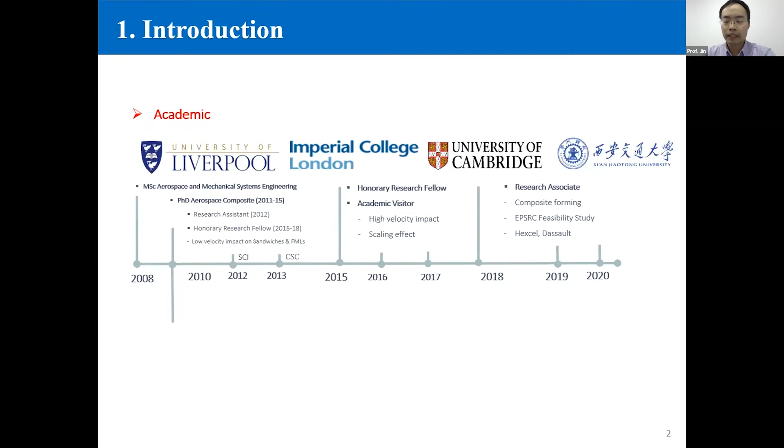Professor Wesley Cantwell already introduced my experience. I got my PhD from Liverpool University, and after that a short academic visit at Imperial College and a 1-year postdoc research at Cambridge University. I joined Xi'an Jiaotong University from 2019, and before that I also worked in industry for 8 years in Liverpool.

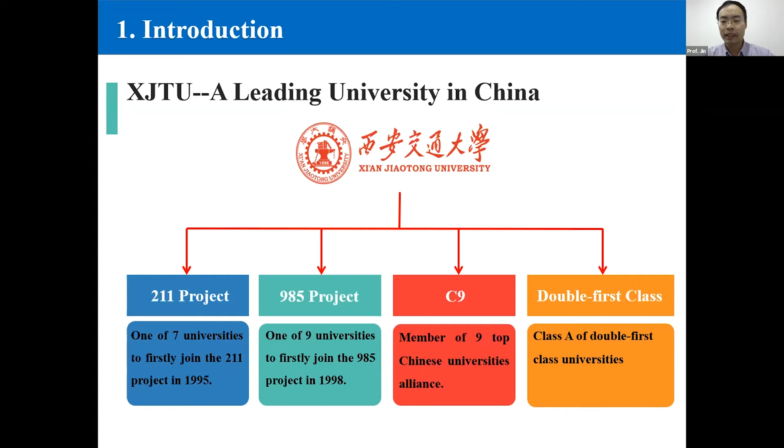Now I would like to introduce my university. It's a leading university in China, so I'll quickly introduce it. I think it's a top 10 university in China in engineering and research. We have 5 key laboratories in engineering, and now we have 4 campuses. The biggest campus is our research hub, and all postgraduate students are in the new campus, which opened in 2019. We also have very good research facilities to support our research.

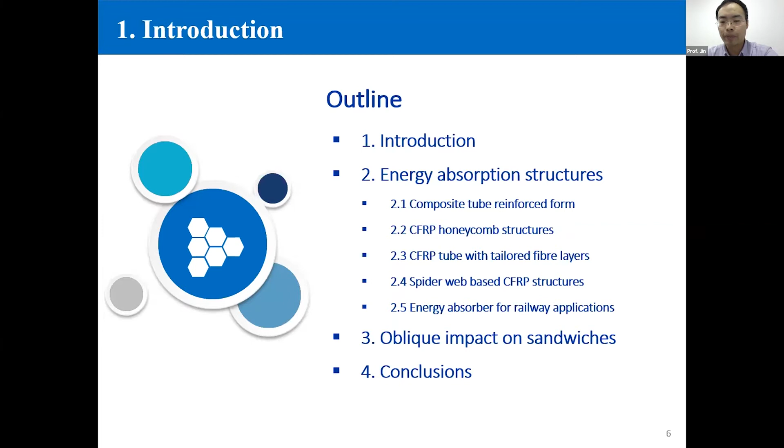So this is the outline of my presentation. Today I will focus on energy absorption structures for aerospace and railway train applications. I would like to introduce 4 structures, including composite tube and rod reinforced foam, composite honeycomb structures, composite tubes with tailored fiber layers, and spider web based carbon fiber reinforced plastic structures - that's our latest work. Finally, I would like to introduce our project for railway applications. The third part is to introduce the latest experimental work on oblique impact on sandwich structures. Yeah, this is the outline.

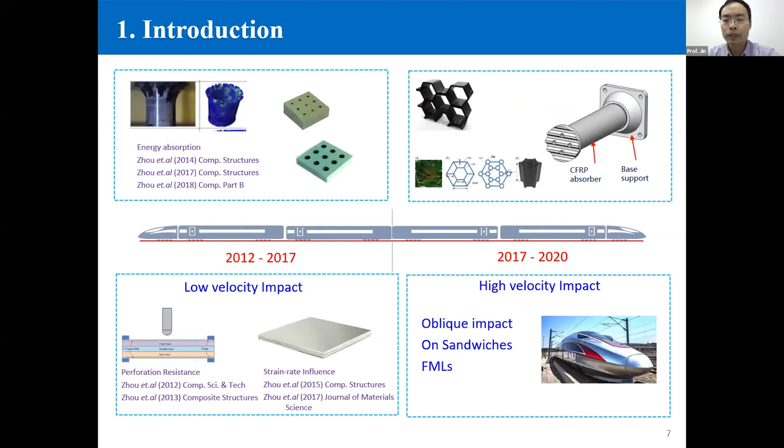So firstly, I would like to focus on energy absorption and dynamic loading rate on those structures. Those structures include honeycomb structures and composite reinforced foam. For the energy absorption structures, I would like to introduce my early research work with my supervisors Professor Wesley Cantwell and Professor Zhongwei Guan. That's composite reinforced foam and carbon fiber reinforced plastic honeycomb structures.

We did both experimental work and modeling work, focusing on dynamic loading rate on those structures. Later we continued working on composite tubes for energy absorption applications. The carbon fiber reinforced plastic tubes with tailored fiber layers increase the energy absorption capacity, and also show higher energy absorption capacity at dynamic loading compared to the quasi-static loading rate. The latest structure is the spider web based carbon fiber reinforced plastic structure - it's very interesting, with a new manufacturing process.

Later I will introduce the latest work, including oblique impact on both sandwich structures and fiber metal laminates. That's the outline of my research work.

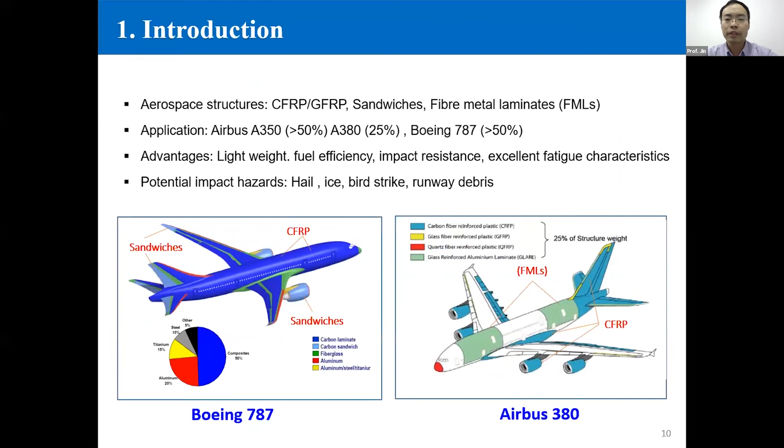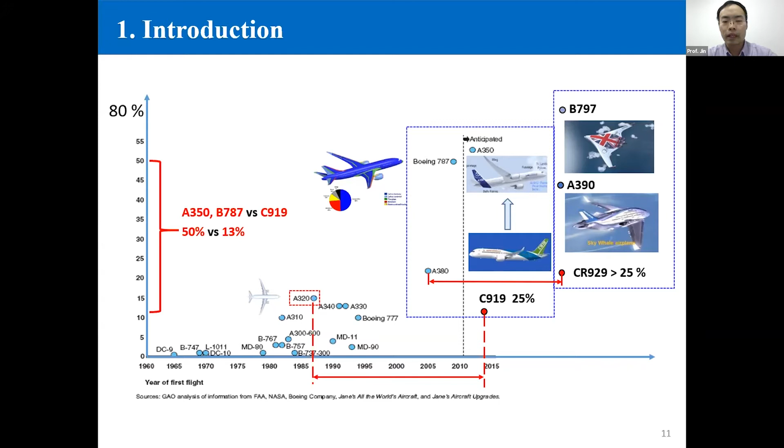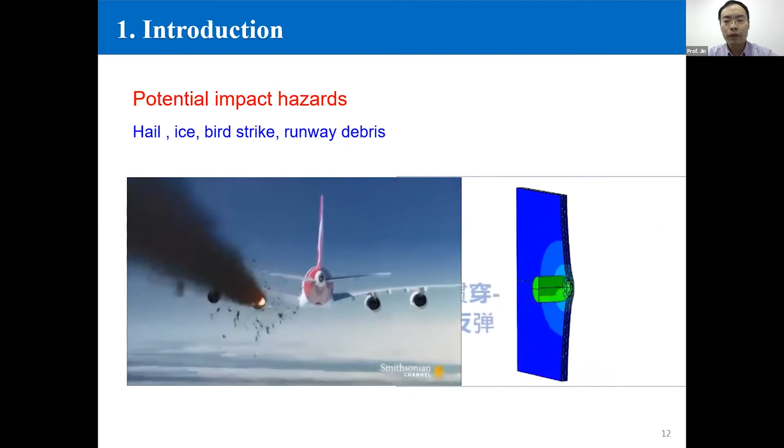So I will quickly go through the introduction. We focus on lightweight structures because lightweight design is important in the aerospace industry, and the potential hazards include bird strikes, runway debris, and engine failure. So we focus on impact on composite structures.

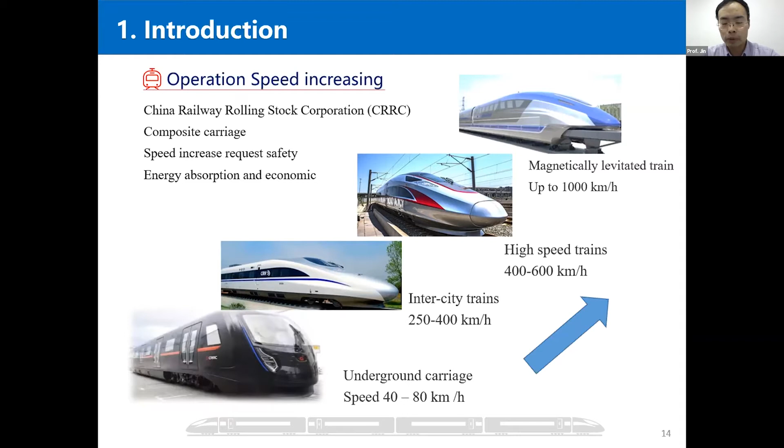Composite applications are increasing, not only in aerospace but also in railway high-speed train applications. For example, in China, the application of composites is increasing. The picture on the left is the all-composite cargo carriage for underground trains, which reach speeds up to 80 kilometers per hour. But the latest trains, including high-speed trains, reach speeds up to 600 kilometers per hour. So our latest research focused on impact loading on those composite structures, and also energy absorbers for high-speed trains.

That's application in the industry. The background first focuses on bird strikes. So we did quite a lot of impact tests on sandwich structures for high-speed train applications, and also composite tubes used for energy absorbers have been used in high-speed trains in China.

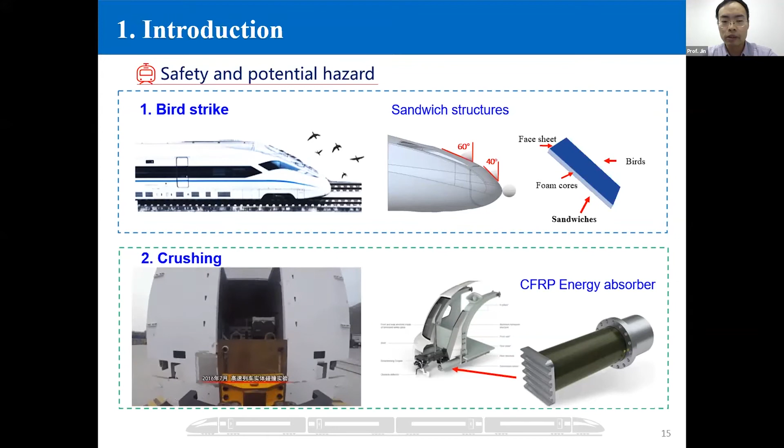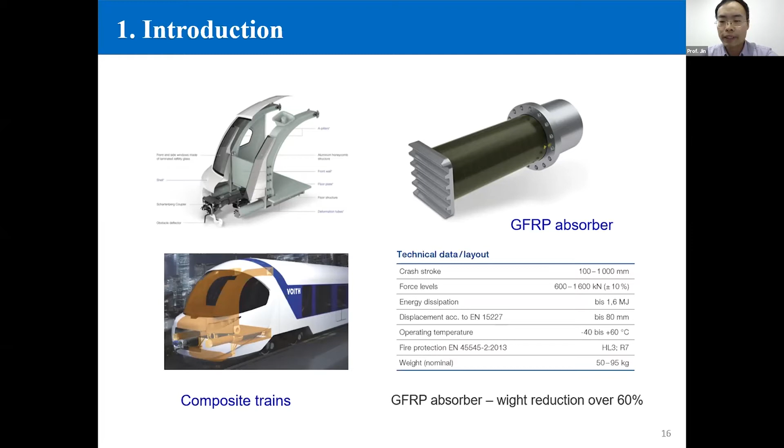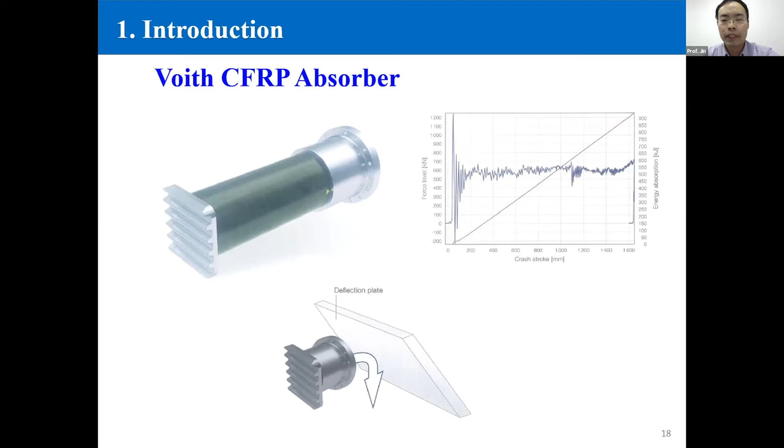So we got a project focused on developing a new energy absorber for energy application, and the maximal force required is 600 kilonewton, and the energy over 240 kilojoule. This is the existing absorber, and we focused on developing a new structure that can have a higher capacity, with specific energy absorption over 50 kilojoule per kilogram, focusing on the demanding requirements of our energy absorber.

We developed a new structure with a tailored layer. Before I introduce the new structure, I'll quickly go through our early research work on composite tube reinforced foam and honeycomb structures. We did quite a lot of impact tests, and we focused on investigating the loading rate effect on those structures.

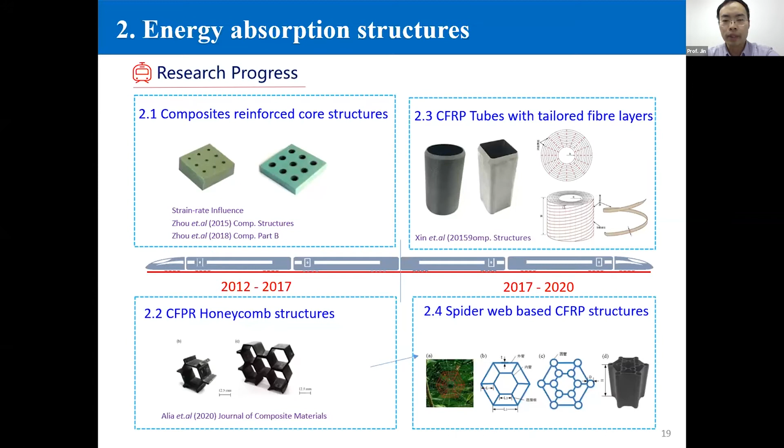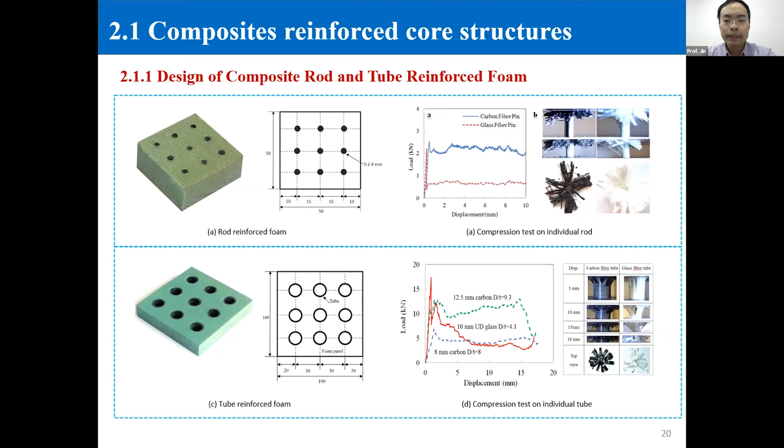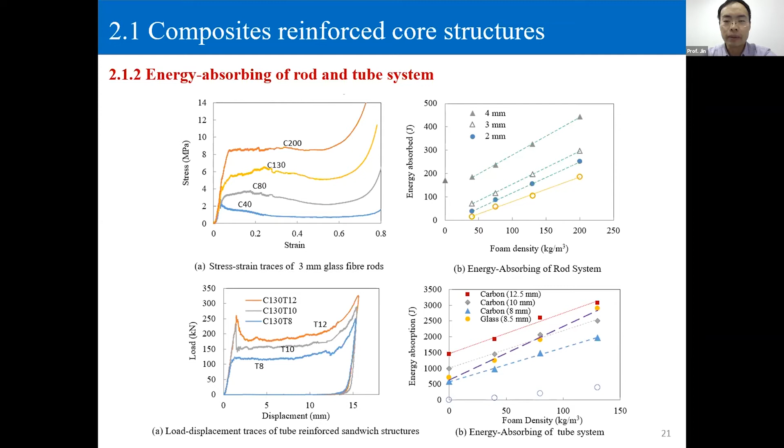We did some tests on composite rod and composite tube reinforced foam. That work I completed at Liverpool University with Professor Wesley and Professor Guan, and we found the energy increased with the core density. We also got the energy absorption chart against the core density, and the energy absorption against the composite rod diameter and composite tube diameter. Using this chart, we can develop new structures for application in aircraft or high-speed trains.

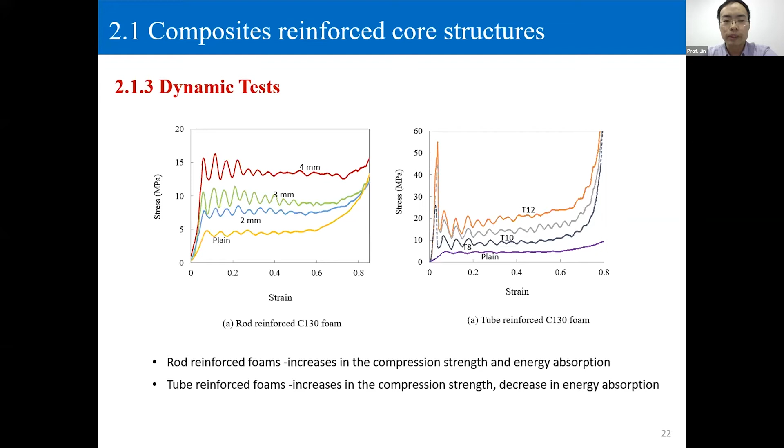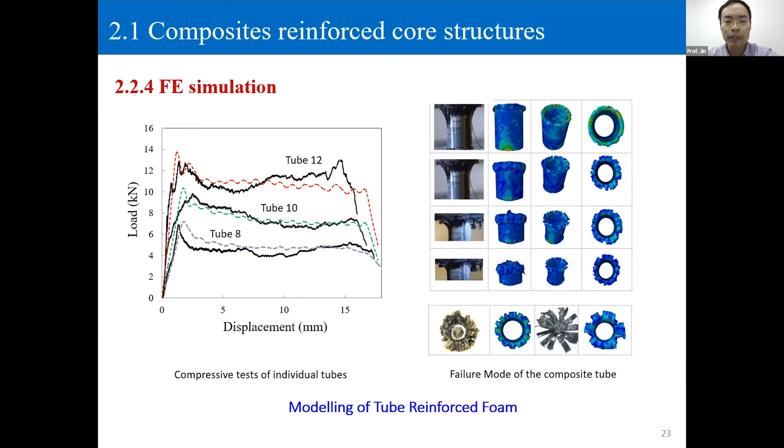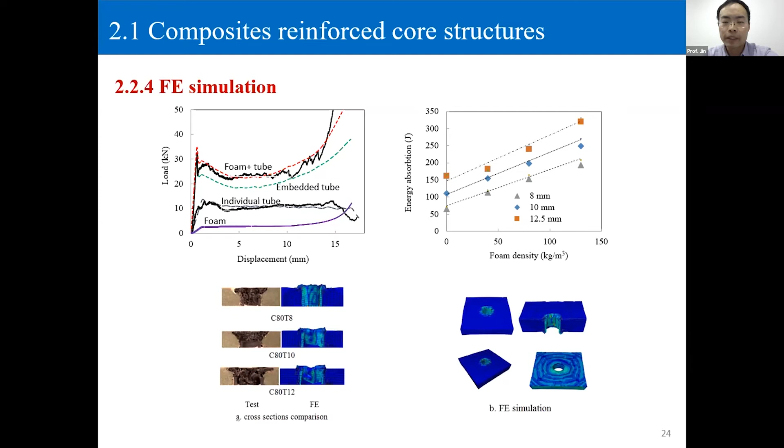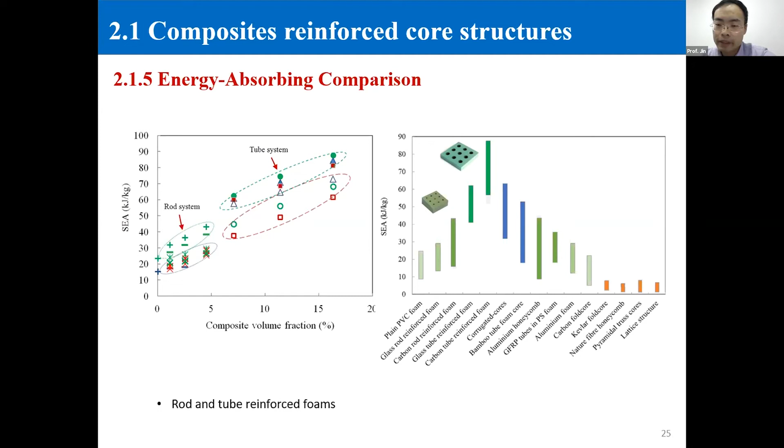And finally, we compared the rod reinforced foam and the tube reinforced foam structures with other structures, and we found the SEA is over 90 kilojoule per kilogram. The energy absorption is much higher than other sandwich core structures.

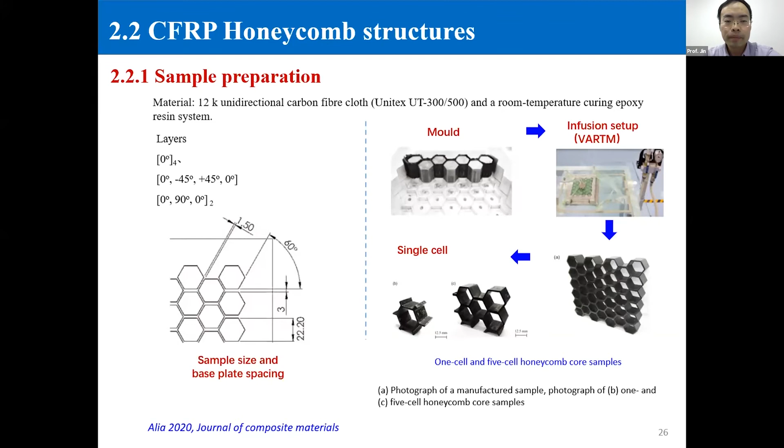In our latest work, we did both quasi-static and impact tests on those structures. Those specimens were made at Khalifa University, by my colleague Alia and Professor Cantwell, and I did the dynamic test using a drop weight. Initially, we focused on the energy absorption with different layers and different manufacturing processing, and my research focused on the dynamic loading rate on those structures.

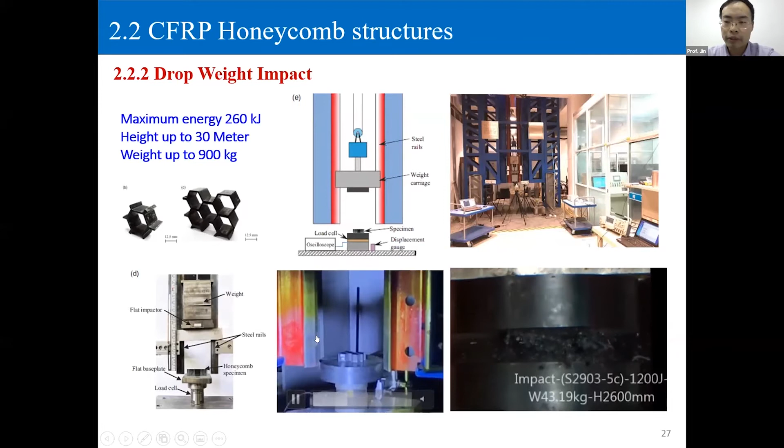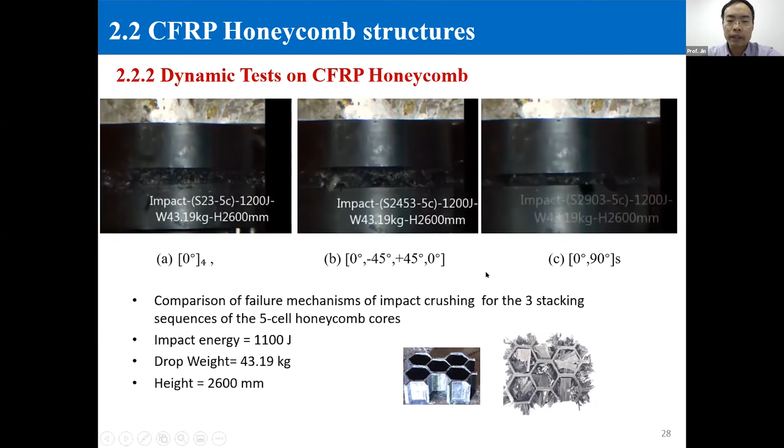From the test, this video shows the test on 3 different structures based on different composite layers. From this test, we can get the load displacement traces. The figure on the left shows the structure crushed at different loading rates, from 0.1 millimeter per minute up to 13,000 millimeter per minute. We tested all 3 different structures.

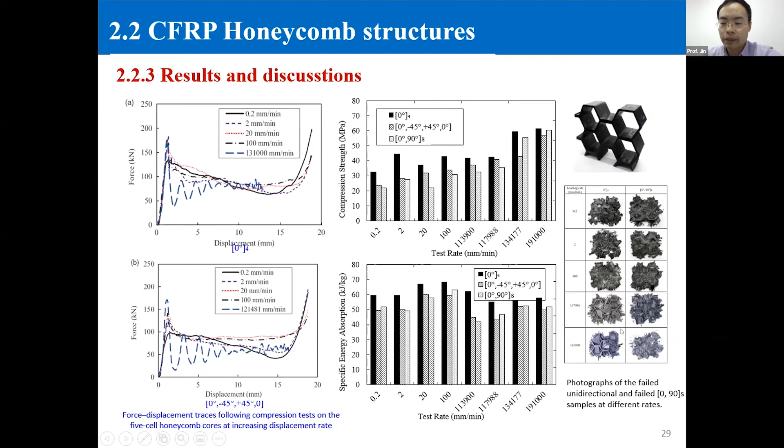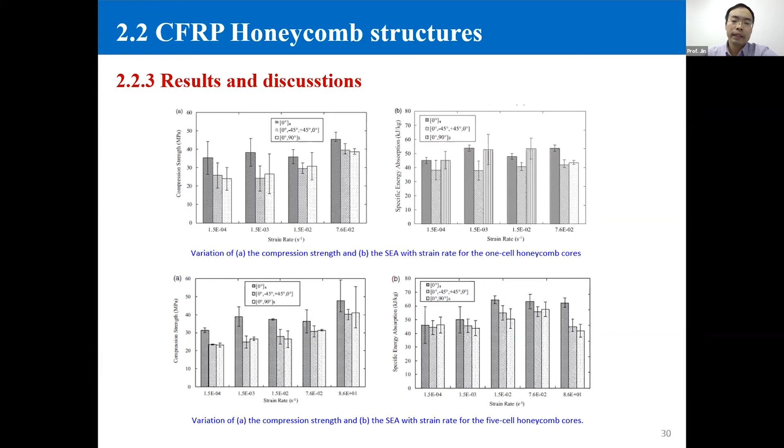We found the compression strength increased with the test loading rate, and the specific energy also increased, but it remained nearly similar at various loading rates. The figure on the right hand side shows the failure mode of those crushed samples at different loading rates. This final result shows both compression strength and energy absorption of those two structures at different loading rates.

Now we move on to a new structure because we noticed the composite tube had lower energy absorption at the impact loading rate, so we tried to improve the performance and get higher energy absorption. We focused on nature-inspired structure, specifically the Bouligand design from natural structures.

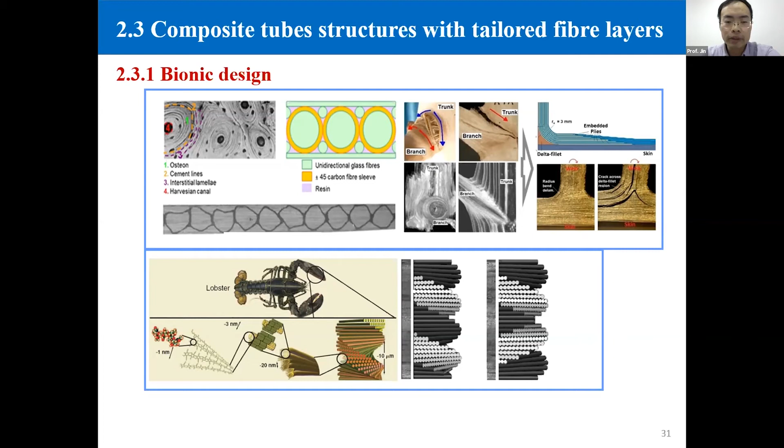This figure shows the microstructure of the hard shell in nature, and we found that this microstructure is just like a brick.

If the fiber is not continuous, the impact energy absorption can be improved.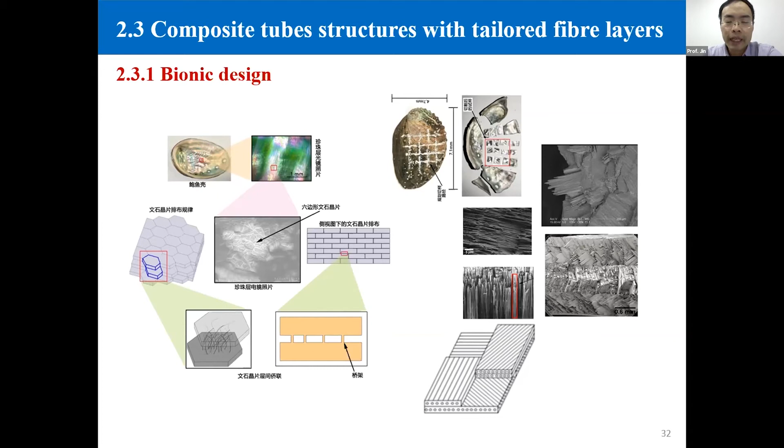Based on this design, we cut the continuous fiber into discontinuous fiber to get better impact performance. This is our composite tube with a tailored composite layer.

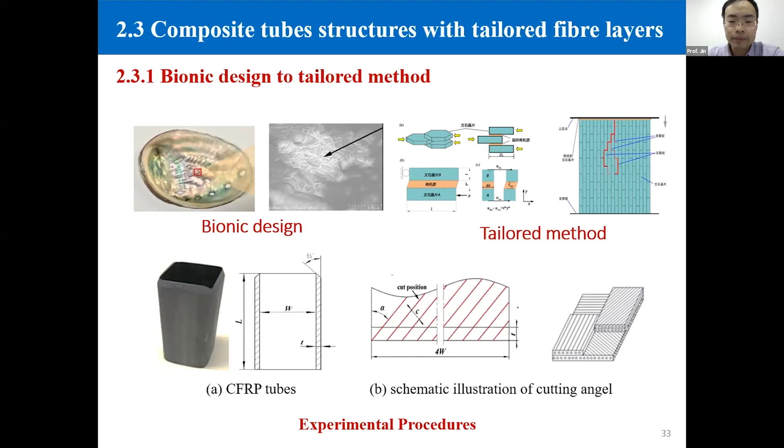This is the manufacture process. We cut the continuous layer to make it discontinuous.

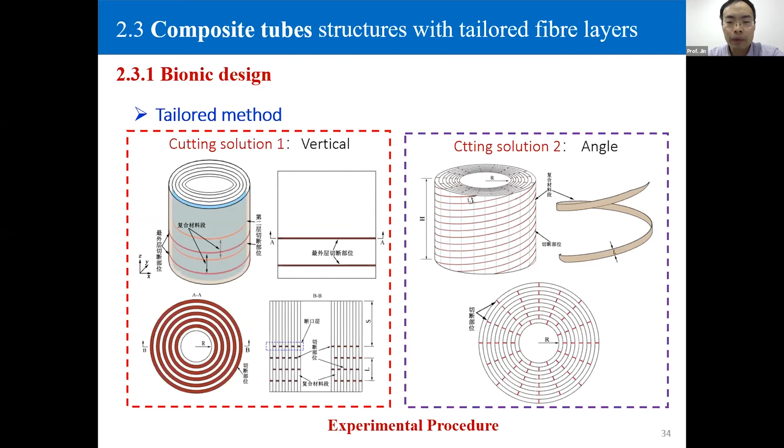We design using pre-preg carbon fiber, cutting it with different gaps and different cutting angles to get different performance. This figure shows the manufacture process.

The pre-preg was cut using an automatic machine, and we define a cutting angle between the cutting direction and the fiber direction.

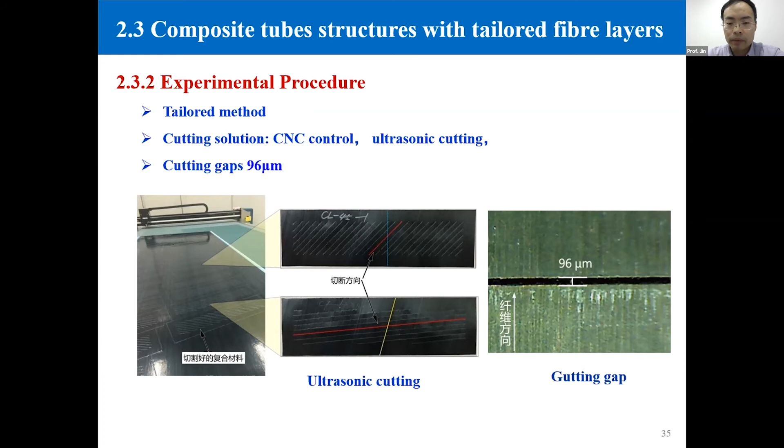We roll the pre-preg and use the RTM process to get the composite tube.

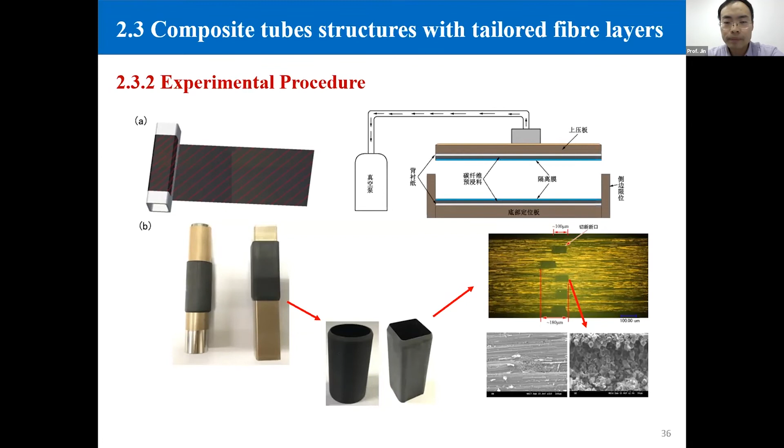After curing, we also inspected the microstructure of the tube and found the fiber was cut in the structure. Now we focus on the mechanical performance.

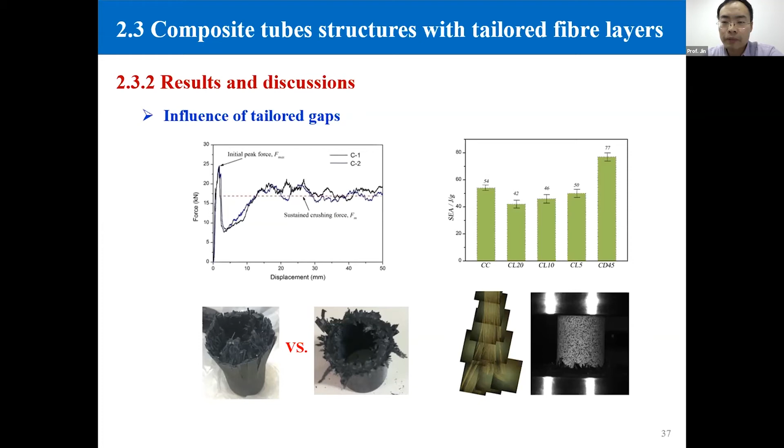We did similar work, performing compression tests on those structures and comparing the energy absorption. We found that a cutting angle up to 45 degrees gives better performance.

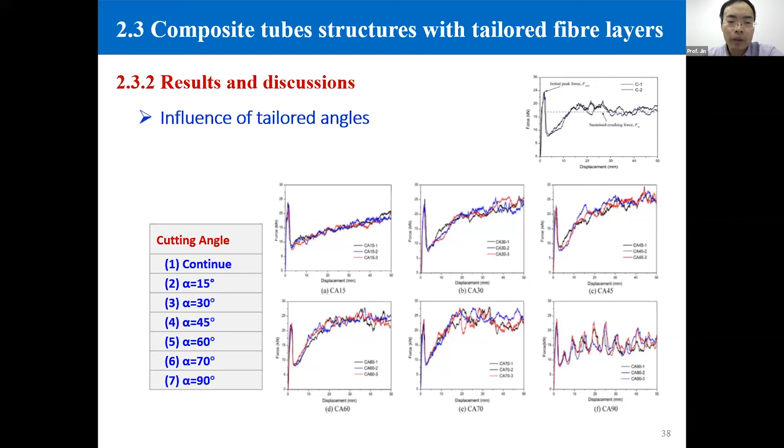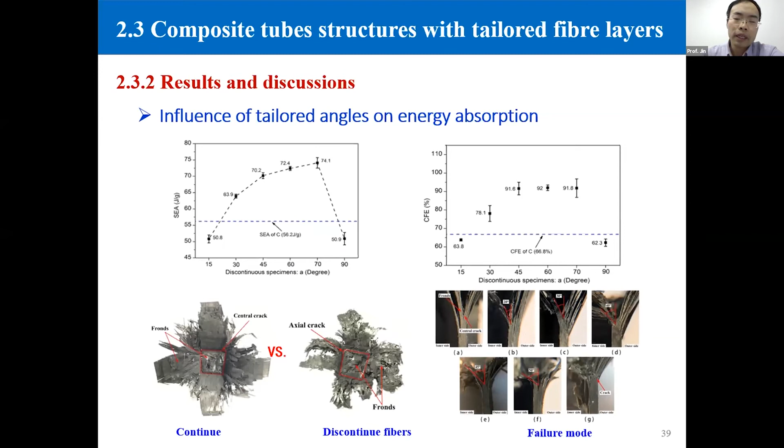Now we focus on dynamic loading. We did similar work using a drop tower to crush those samples, from lower energy to higher energy.

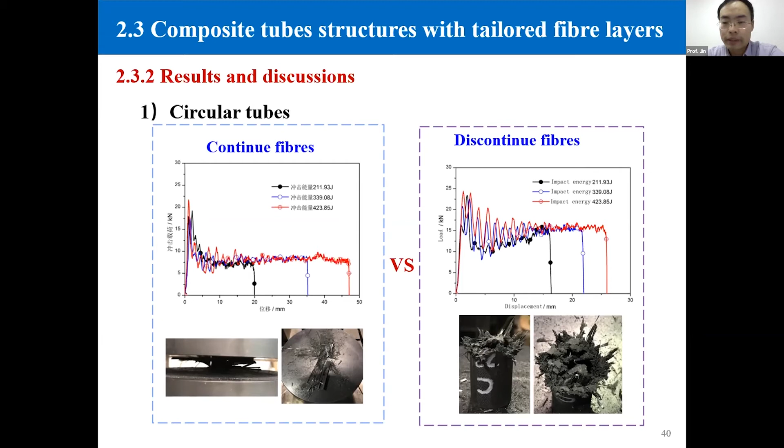The highest energy applied was up to 423 joules on those structures, and the failure mode is also shown on screen.

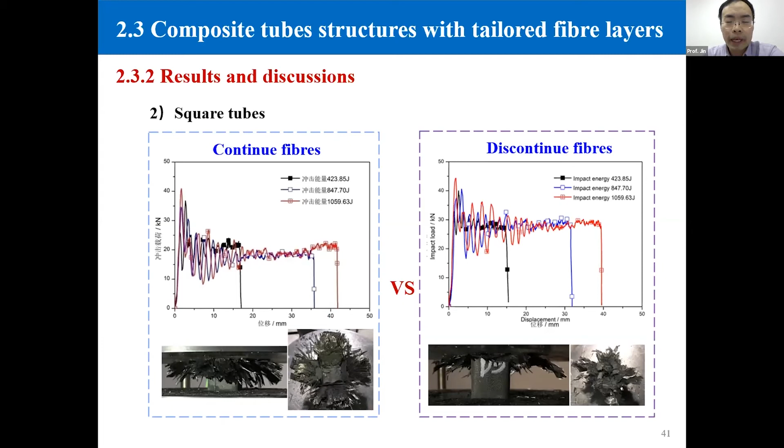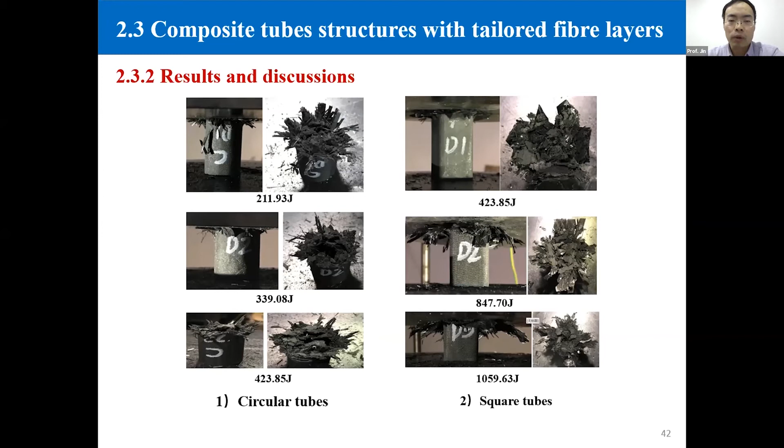We compared both circular tubes and square tubes, and this shows their failure modes. We can see that the composite tube is crushed into small debris, meaning it absorbed more energy.

Finally, we summarize the energy absorption. We noticed that for the normal tube, the energy absorption at a quasi-static loading rate is higher than at a dynamic loading rate.

But for the composite tube with discontinuous fiber, it can achieve higher energy absorption at a dynamic loading rate.

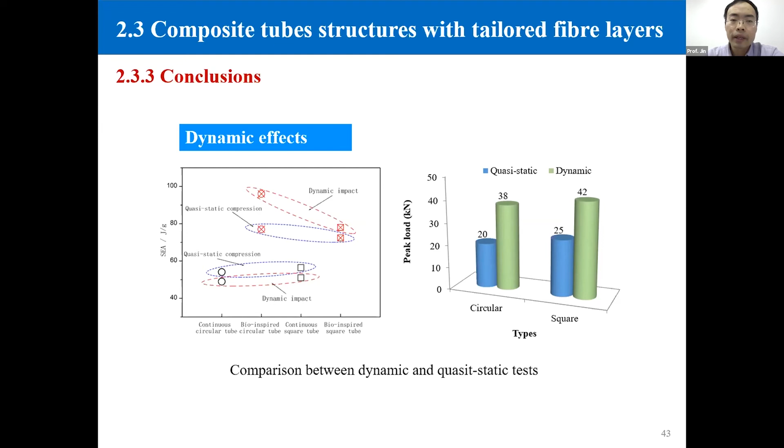Now we move to a new structure. We try to make a bigger composite tube, which requires a proper diameter-to-thickness ratio.

To get better performance for the long tube, we need stability. The tube must remain stable during the crash process.

So we got an idea from the spider web, and also from the microstructure of the beetle, and designed a new structure like a spider web.

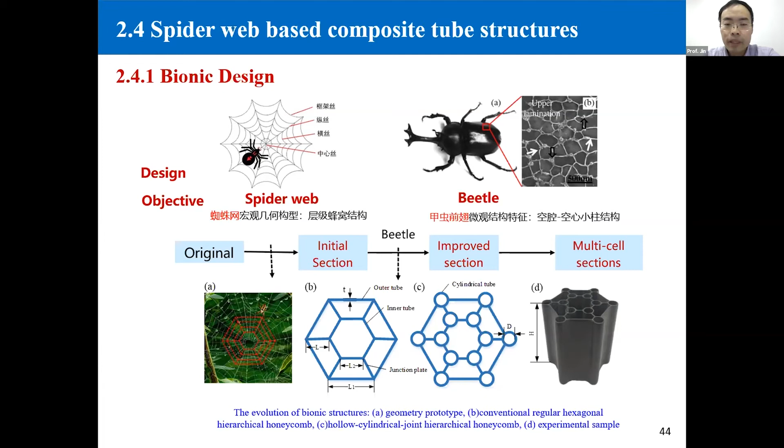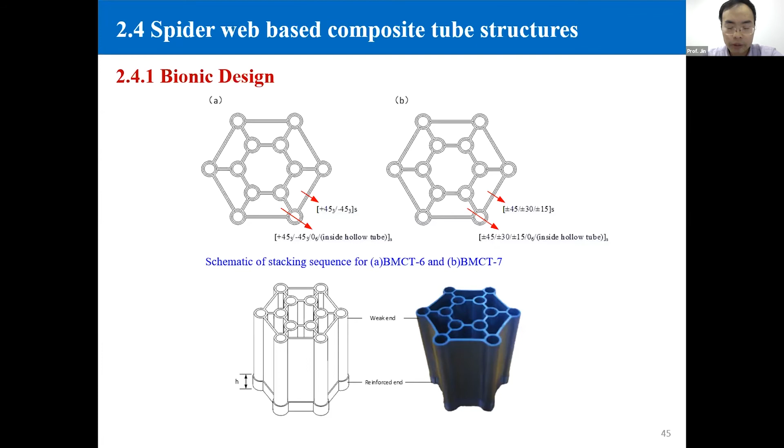The parameters include different layers and different geometries of the structures, including the diameter of each small tube and the thickness of the wall.

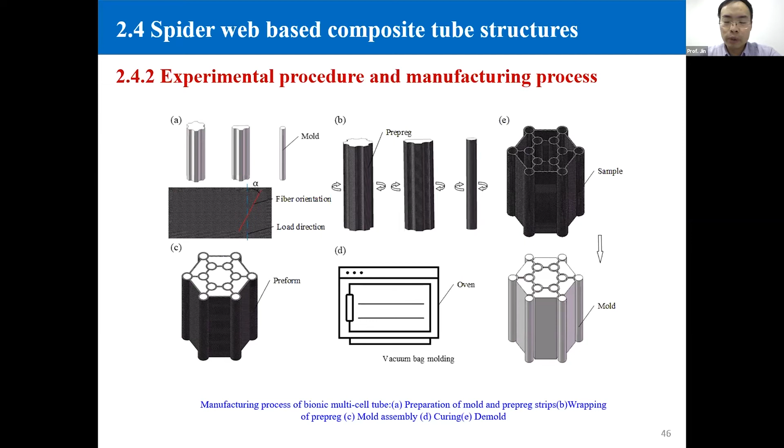The molds are made using a 3D printer. After curing, we remove the mold and get the final structures.

This is a sample with XCT inspection. We need to make sure this manufacturing process results in fewer defects.

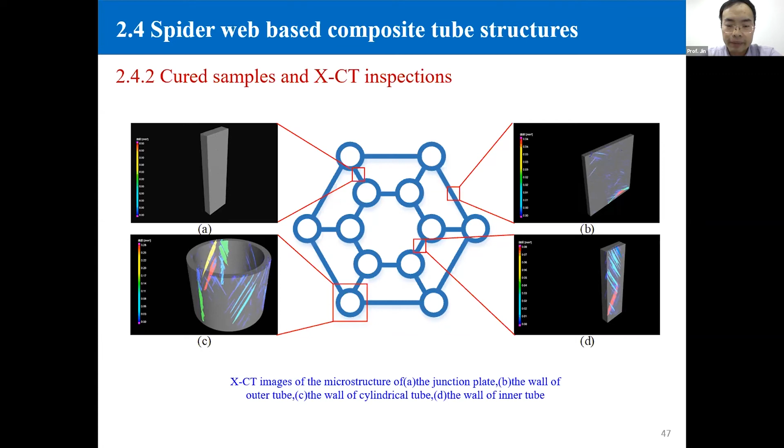This is the geometric design and parametric study.

We have different dimensions for these structures, including the diameter of the small tube, the length, the distance between inner tubes, and the distance between outer tubes.

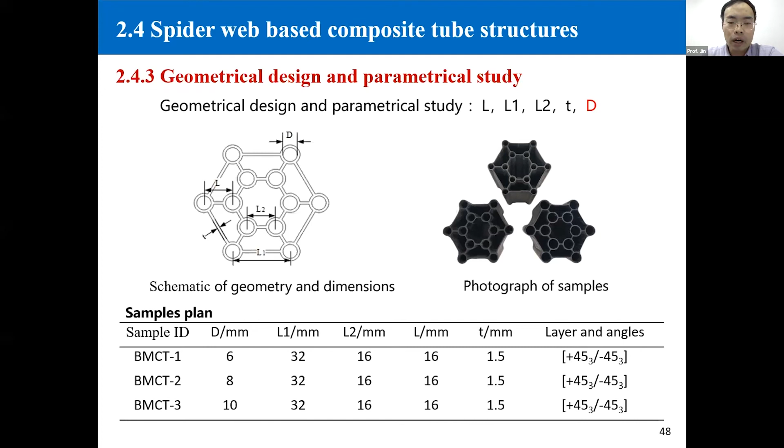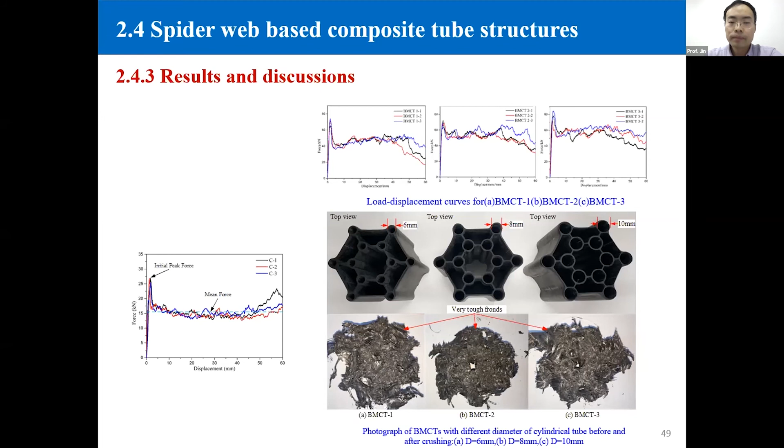Once we had the parameters, we made a number of samples with different geometries and tested them.

This sample has a different geometry, and we performed both constant-rate and dynamic tests.

This figure shows the best two samples, number 6 and number 7, where we see the maximum peak load is up to...

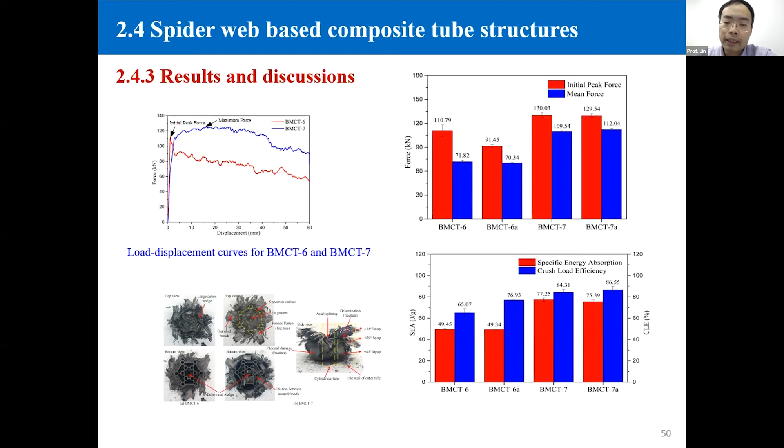110 kilonewtons, and the specific energy absorption is up to 77 kilojoules per kilogram.

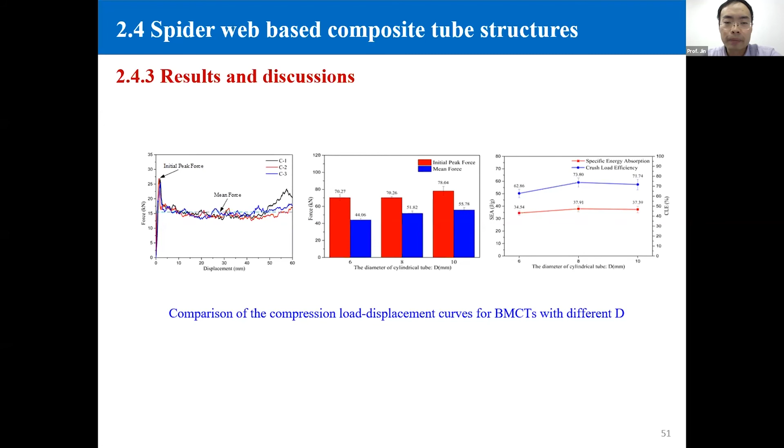We also compared this with a normal plain tube, and found this structure performs better than normal tubes.

Using this structure, the diameter is up to 60 millimeters. Now we focus on the application for the high-speed train.

The high-speed train requires a structure up to 133 millimeters in diameter, with a minimum peak load of up to 600 kilonewtons.

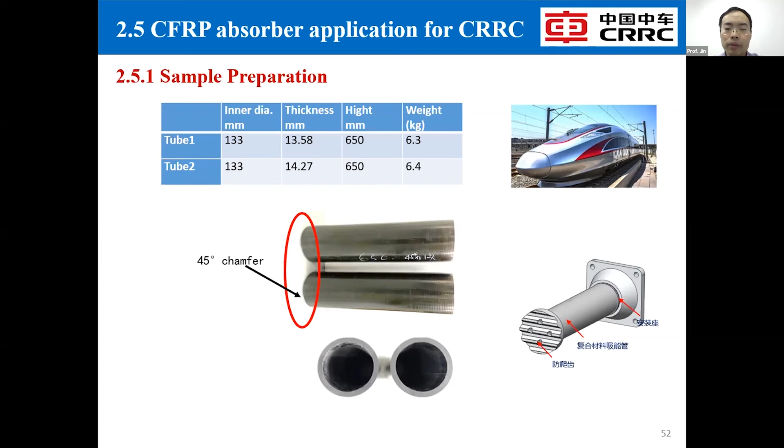So we made this composite tube, and we also used modeling to simulate the trigger.

We found that the composite tube with a chamfer has a lower energy absorption capacity.

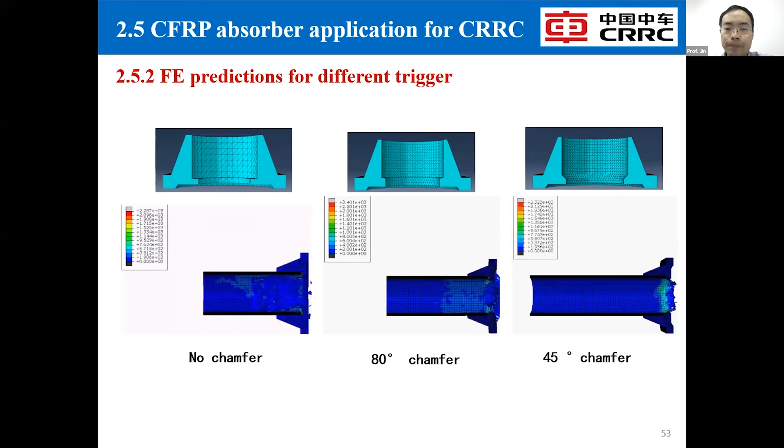This is the simulation. Using finite element modeling, we are able to predict the peak load and energy absorption of these structures.

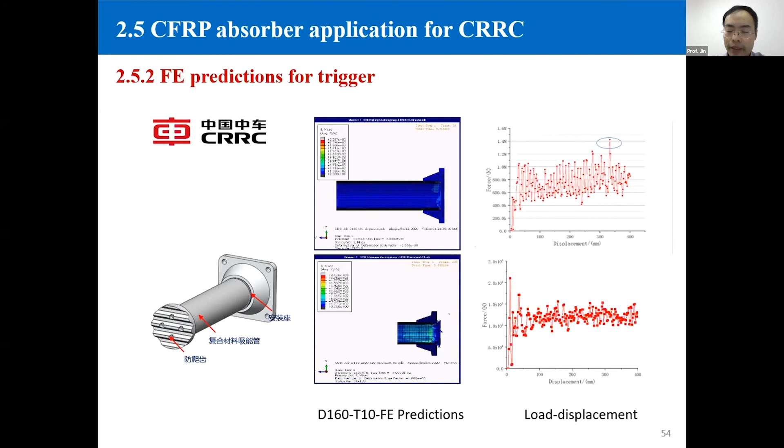Now I'll quickly show the latest work on simulation and experiment for bird strike, focusing on oblique impact on sandwich structures, and the latest test on those structures.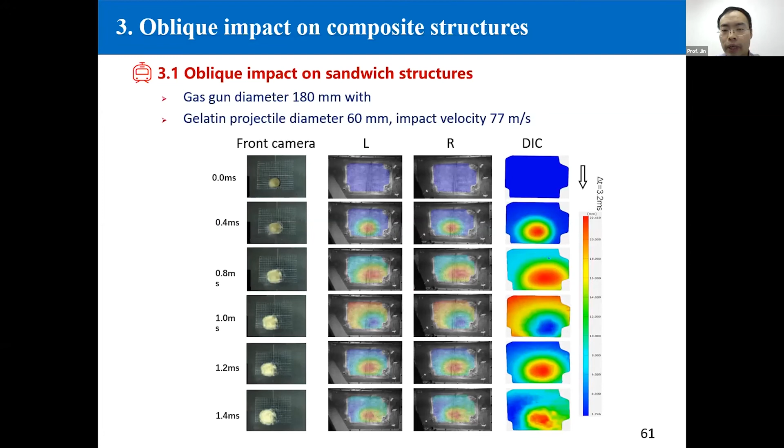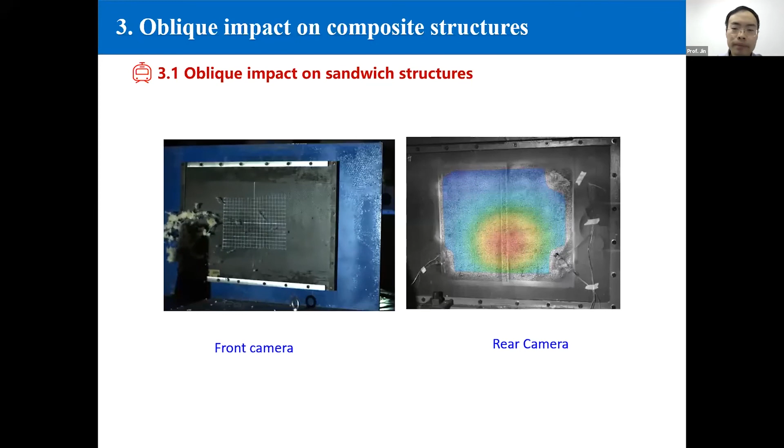The figure on the left is the front camera, and on the right is the DIC measurement. From this DIC measurement, we can measure the maximal displacement during impact, and using this data we're able to validate our modeling. This is the DIC output displacement at different locations of the specimen, which also helps validate our modeling.

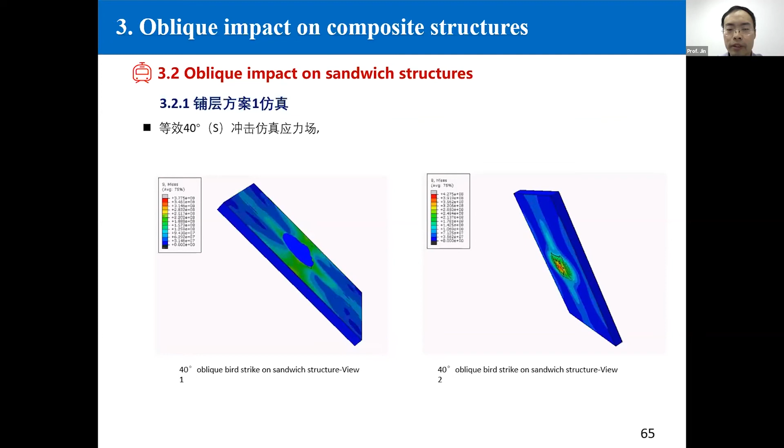Using the modeling, we can do further design on these structures. This is the bird strike simulation and sandwich structure for the high-speed train, and we simulated different oblique impact angles.

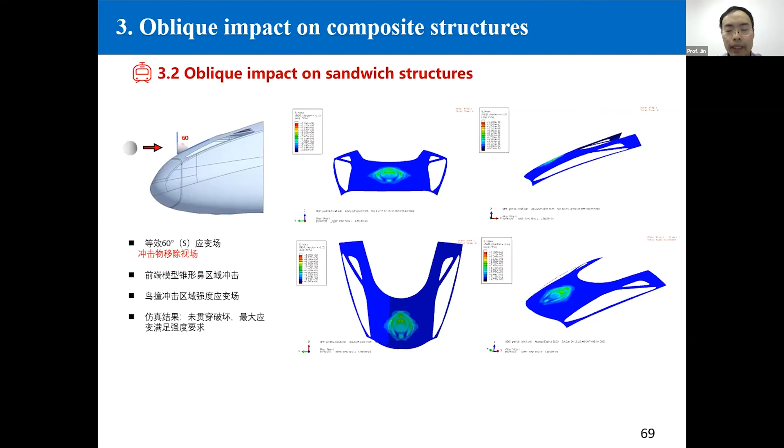Finally, we'll be able to use the validated modeling to simulate the impact on the front door and head of the high-speed train. That's the oblique impact and sandwich structure work.

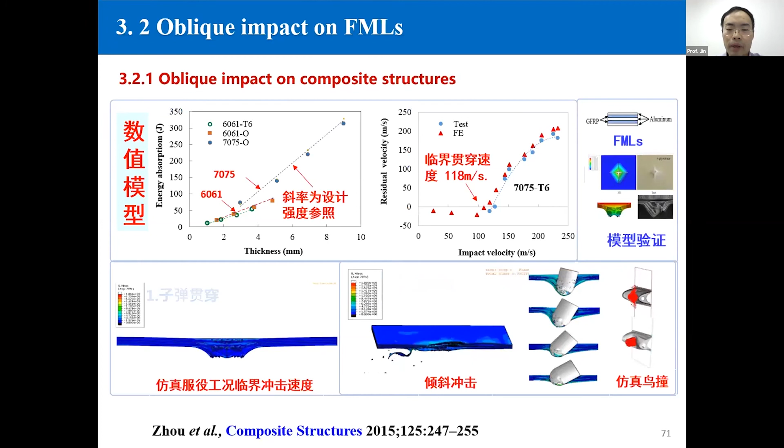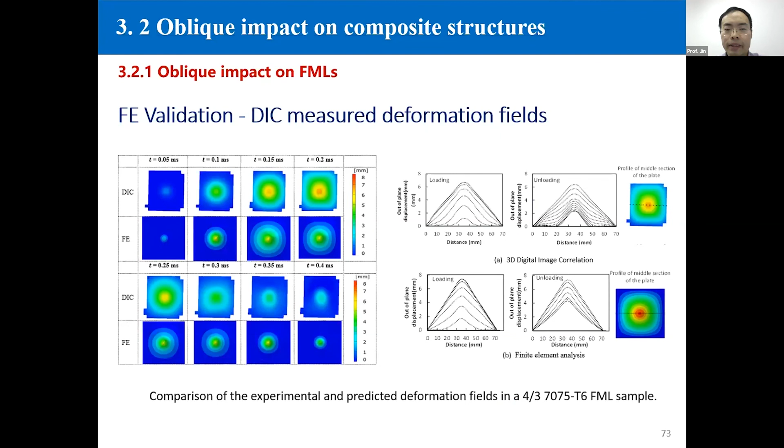Finally, we also continued our earlier work on oblique impact on fiber metal laminates. We did a high-velocity impact test using a gas gun, and also did an oblique simulation, using that data to validate the modeling. Now I'd like to make a quick conclusion.

The cutting angle has a significant effect on energy absorption. Increasing the cutting angle up to 70 degrees is able to increase the energy absorption up to 74 kilojoules per kilogram.

The energy absorption with tailored composite layers is higher than the plain composite tube with continuous layers. We also noticed that the energy absorption of sandwich structures at high oblique impact is able to absorb more energy.

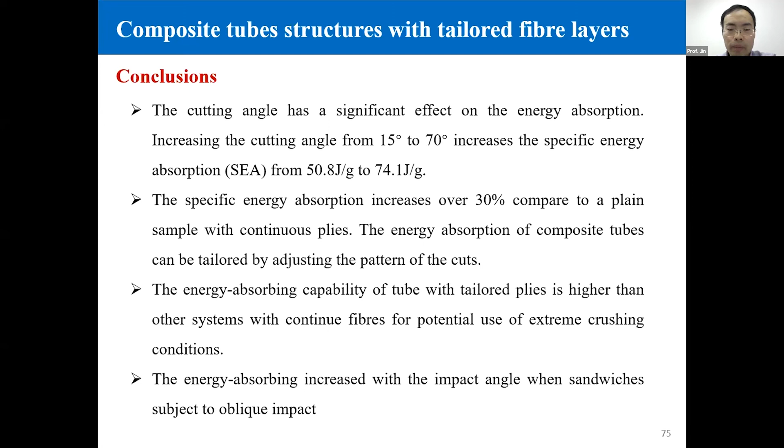Finally, I would like to introduce our research group at Xi'an Jiaotong University, and we are also looking for further collaboration with my colleagues.

Finally, I would like to thank all my colleagues and supervisors during my PhD study, thanks for their guidance, and thanks for the research collaboration. That's my presentation. Thank you.